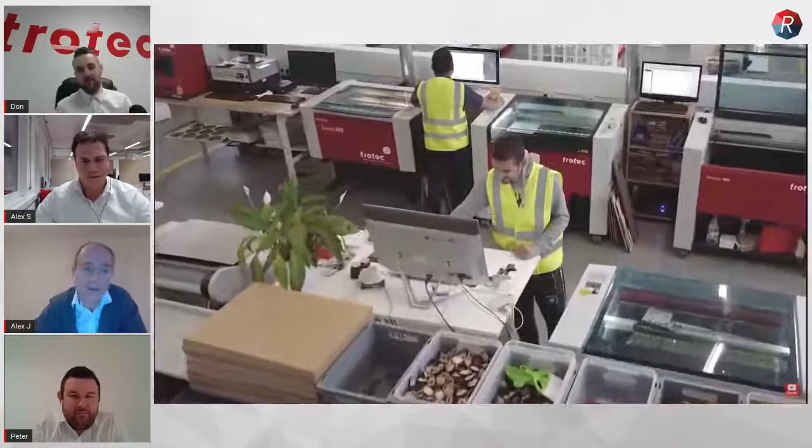To be honest, in the beginning there was some initial skepticism, and I totally understand, because when you change something that is well known and loved by the people, everybody was like, okay, where's my job control going? And we're going to answer this today too.

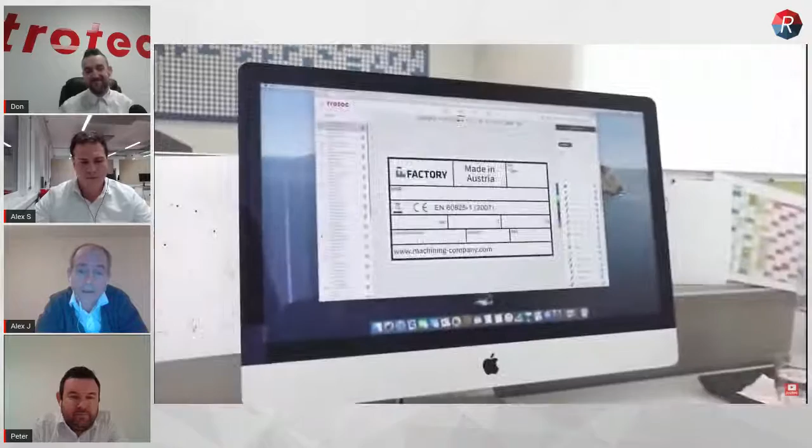But now we already have a lot of Ruby fans. People love how the photo engravings turn out, the import functions, hot folders. We're receiving requests that people want to use the Ruby API to connect their web shop to it and to fire their lasers from external software programs. So we've gained a lot of insight in a very short period of time in the last weeks.

This is exactly why we are doing this open beta, to learn from you and to drive and develop Ruby together with you and to change the laser world. Thank you for contributing to Ruby. We're going to continue to do this.

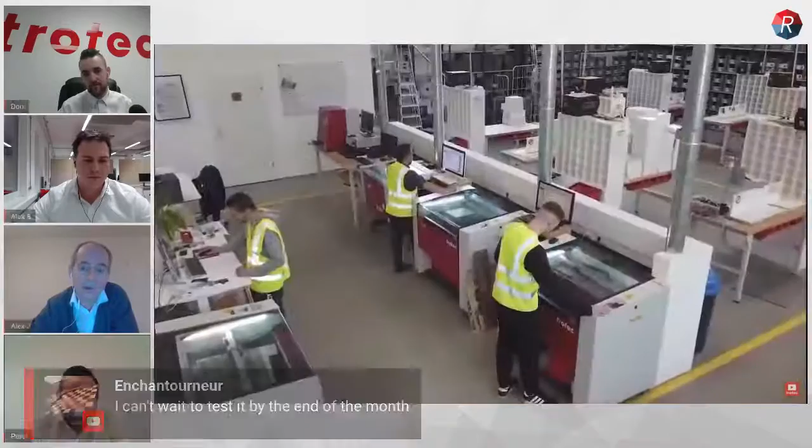So why is Ruby there? We started this initiative, I would say, a few years ago when we developed Job Control 10. So this was quite a while ago. At that time, we realized that how people work with their lasers has changed. Laser engraving and cutting is not what it was 10 or 15 years ago.

It went from the garage to manufacturing settings and workshops. So it's big business already. A lot of our customers, they multiplied their business. So the requirements, what the software should do and has to do, changed and increased.

People wanted to operate multiple lasers at the same time from one PC. They want to use Macs, they want to use mobile phones and tablets to control the lasers. They want software where they can easily create their laser jobs and work with their laser parameters, very, very simple and straightforward.

And the laser should not be a standalone unit. The laser should integrate into a total overall workflow and exchange information and files with other systems like ERP, MIS, or webshop e-commerce systems. Multiple users, multiple roles, and pre-press integration, that's really a must. So the demands from users, what we experienced in the last years, really increased.

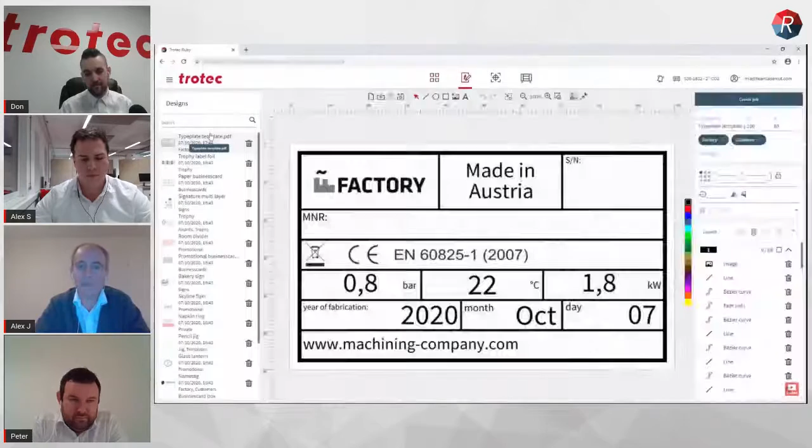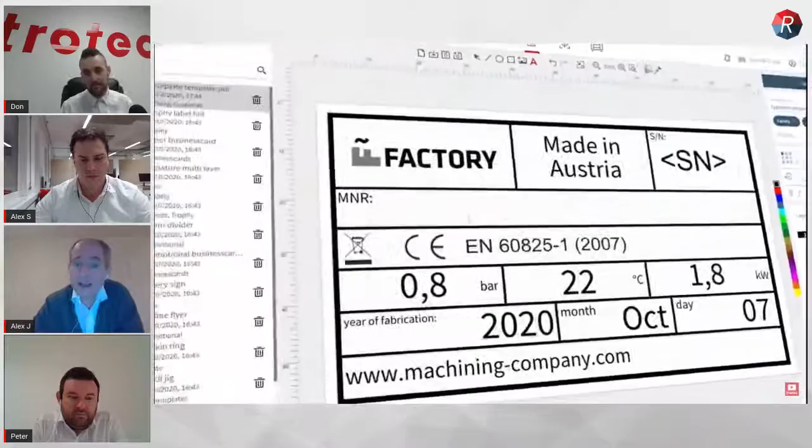And that's what we like to do with Ruby. Ruby stands for all that. We want to connect lasers. We want to connect laser users. Ruby is open to any customer workflow, providing a high degree of automation. And we want to provide laser users with all the tools they need for their daily work to really redefine laser software and set new standards for you and together with you.

And we're doing this now with the open beta. We're embarking on a digital journey, and we would like to lead you into a new era of laser engraving and cutting. So that's my small pitch for Ruby.

And now I would like to hand over to the tall Alex, the big Alex, to give you a walkthrough and show you what Ruby is capable of and how it works. So it's your turn, Alex. Thank you, Alex. Even we get confused sometimes.

Well, thank you for the introduction. It's a pleasure really to be here today, to have all of you on this webinar today. I would like to show you and give you a first demonstration of Ruby, and give you a little introduction to what we can do with Ruby already now with the open beta, and give you also an idea of where we're actually going.

So I think first of all, and probably the most important and one of the most significant changes, is that Ruby is a web-based software. So this will give us many, many benefits in the future.

Because Ruby is a web-based software, it means we will be able to actually just directly use and access it from a web browser. So in this case, I just opened Google Chrome, and I can directly log into the software and start working with my laser right away. This means that in future we will be able to really access all data, all information, all customer information from anywhere, anytime, just online via the internet.

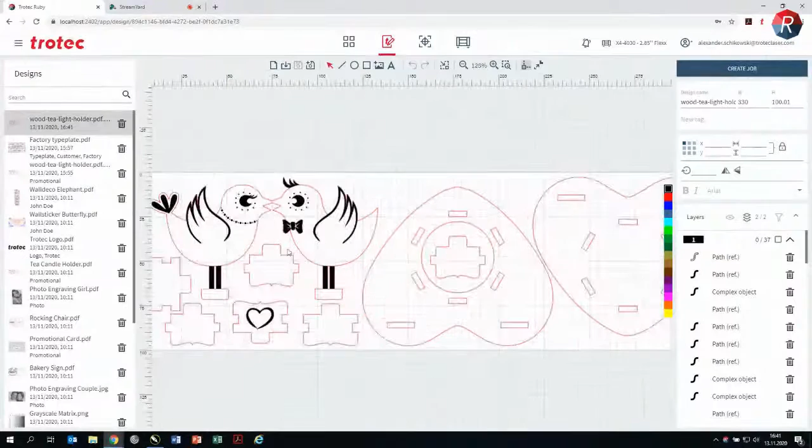It's here now already, and I will enlarge my screen a bit. I can directly open it in Ruby, have everything available in here, have the design in here, can have a look at it, can check it, see if everything is correct in here done. In this case, it's all good. I can create a job out of it now.

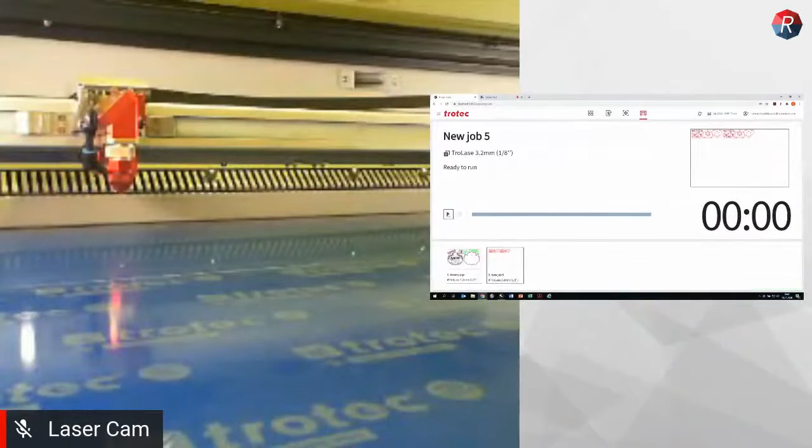The laser you see is already progressing and lasering firing next to me. I will stop this now for a demonstration and show you another use case.

So you saw how really super easy and intuitive it is to just directly import a PDF file without actually going through any time-consuming printer driver, or also any additional graphic program, for instance. You can just directly import it.

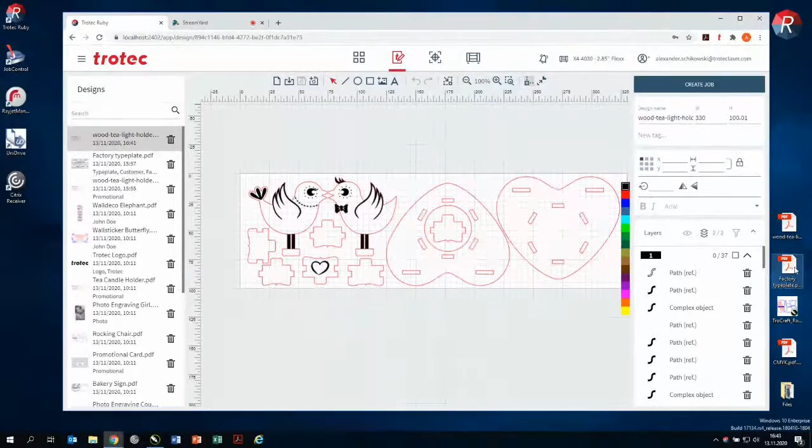But also, even if we need to make some adjustments, I will again just directly import the PDF file in here, can open it in here, and have my design available here as well. Some of you might notice this is the design file we have seen also in the Ruby launch video. And I can make adjustments directly in here now.

So in our case, the date is not correct, it's still the 12th. So I can jump into here, make correction, set it to the 13th of November, and again, create a job out of it.

I can duplicate it again with copy paste with the shortcut on the keyboard. And I can also do kind of small batch serialization now in here. So I can directly again here, just click on the design, edit it, and can increase the serial numbers.

Going to 18. Going to 19. And last but not least, this one to 20.

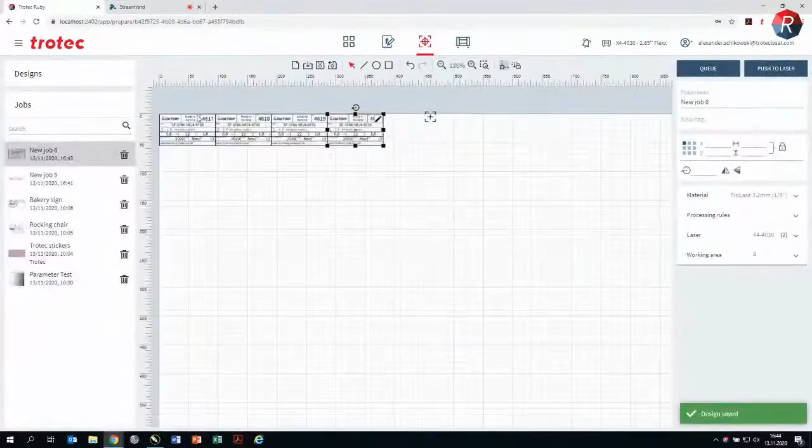And I can very quickly make a small batch serialization of these templates directly in Ruby without going to a different software again or any editing program.

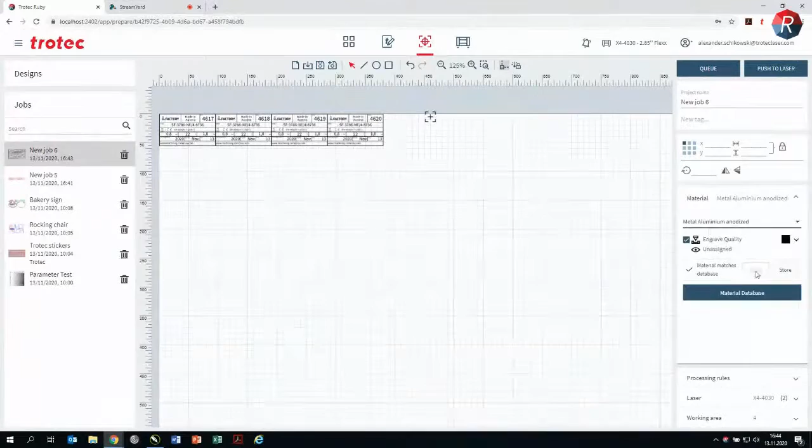And again, just select the correct material. So for those templates, let's assume we are using some anodized aluminum. So would all be correct set again, and can then again push it to the laser, and I could start lasering right away again.

So you see also how much flexibility Ruby gives us in terms of graphic editing functionalities. But we also understand that from time to time, users just prefer to actually stay in their graphic editor. And for this, Ruby is also providing some really cool features and benefits.

So during the open beta now, we are also delivering with Ruby a small application for Windows, called the Tray app, which is running here down in the taskbar.

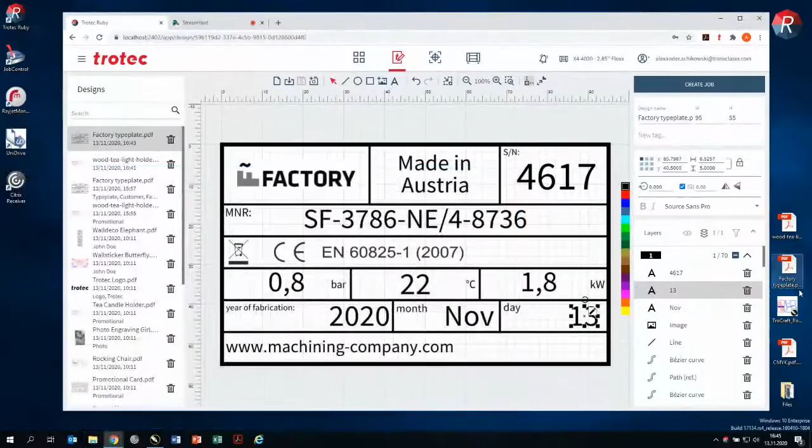And this tray app also contains an import folder. So I can open this directory, and whenever I save a file to this import folder, it's automatically uploaded to Ruby. So I also prepared a job in CorelDRAW for you, this rocking chair. And when I push this now, publish this as a PDF, and save it to this import folder,

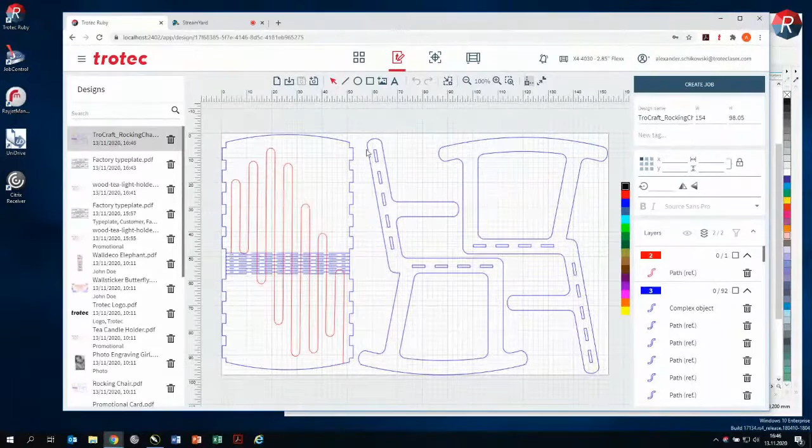it will automatically be imported in a few seconds to Ruby. And it appears already, it is ready here. So this means you do not have to actually complete the designs, for instance, if you would like to stay with your preferred graphic editing, a graphic editor, you can just directly do all this.

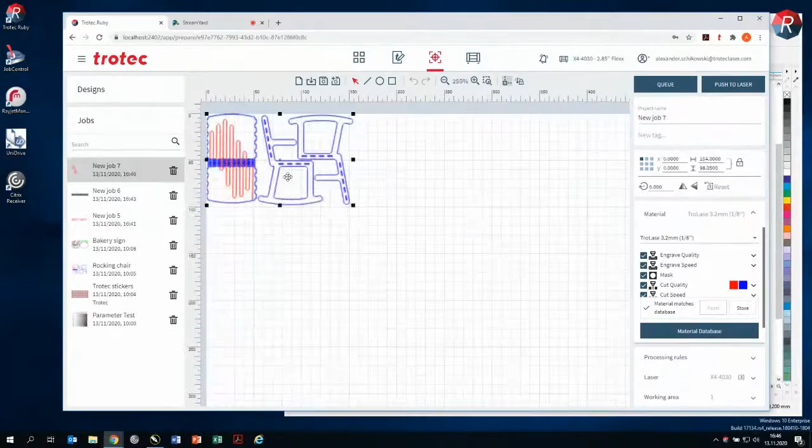But still, as Ruby is directly importing those files, it provides us with a lot of functionalities also now, as we can actually also edit these designs directly in here. So we can still, for instance, transform them, enlarge them, make them smaller, also rotate them, for instance.

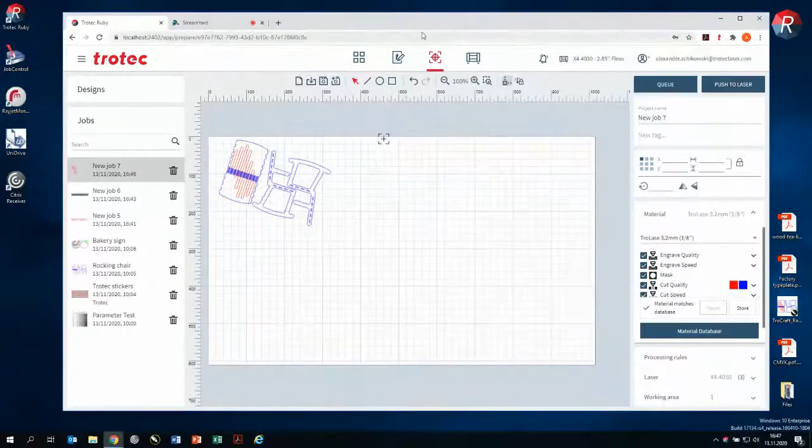So this was just as an example, some examples for use cases of what we can do in Ruby. I would now also like to go into more detail of all the individual phases in Ruby, because you might have noticed that whenever I progressed in the workflow, we're also changing the pages up here. So we're having basically 4 main steps in Ruby that guide us through the entire workflow.

First of all is the management phase. The second one is the design phase. The third one, the prepare phase, and the fourth is the produce phase. I will say a few words now to all of the individual phases.

Basically, the management phase really is there to administrate all our different designs and jobs, but also gives us the possibility to manage them in a more detailed way. Ruby now also comes with a system including tags, so in the tags we can attach our jobs with some more information that can be used for enhanced administration, but also for instance for searching and quick identification.

So we can, for instance, just attach them with some information on what customer we have made a job for, good old John Doe, but also what type of application is it. Is it a promotional application? Templates, for instance, as well.

And we see here, there's a differentiation between the designs in here and the jobs. Basically designs is all the different files we directly import to Ruby, the pure graphic information. And as soon as we attach some material information to it, it's becoming automatically a job.

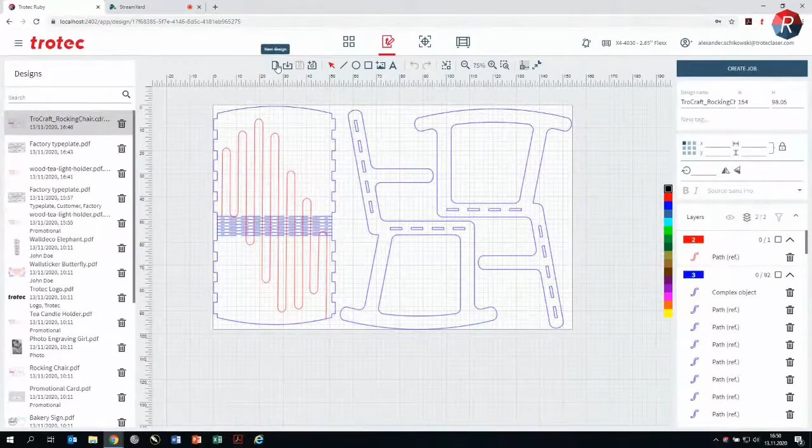I create a new page, and we see here on the top toolbar we have some drawing functionalities and capabilities already. For instance, we can make a rectangle. Here on the sidebar, we also have the properties for it, and we can adjust the size of this, make it 100 by 60, lock the proportions again, and fit this here.

We can also, of course, add ellipses, circles to it, or also lines, and we can also add text to it. So I use the text tool to enter some text in here, a name, Lucas, for instance.

And here on the side, on the property field, again, we have some additional information and properties to modify this text now. So we can change the font type, for instance, something like this. We could also make it a bit bigger, make it a bit bold.

We can also add an image directly here. So add this image of a tractor to it. It's imported, but it's a bit too large now, so I'll make it a bit smaller, then increase it a bit.

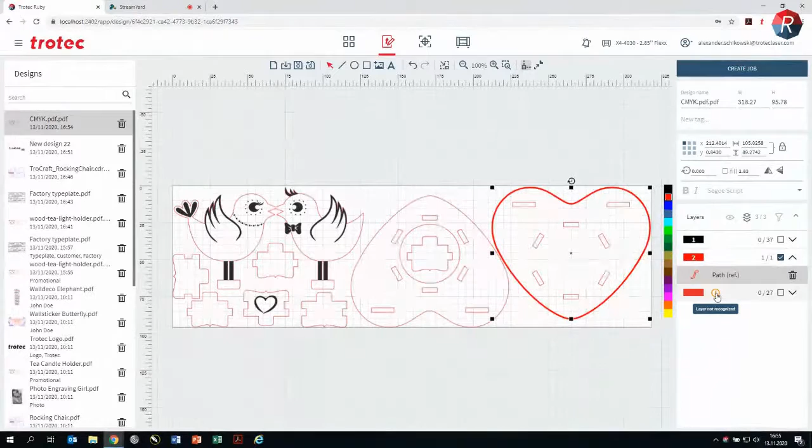But I can just select it here, assign it to the red color, to the red layer, and everything matches here again. Also the red one here, I changed this to CMYK. It's recognized, and I can select it now and assign it to this layer, to the red layer, and all is good and can be processed now by the laser as well.

Also, we see here now that this was actually not set as a hairline. The height here, we see the line width is 2.83, and we can make this now directly here in Ruby and set it to 0, making all the adjustments we need.

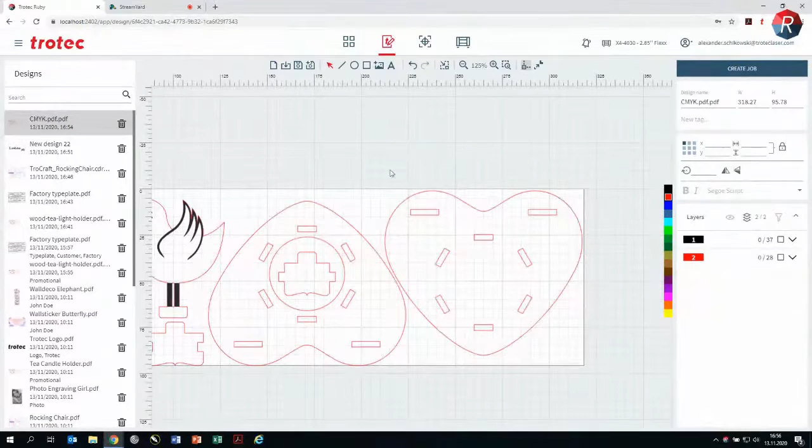But even though it would not be put to 0 here, the laser can still process it and it will still be recognized as a vector in the prepare phase. Let me put this back now and show you this in the prepare phase.

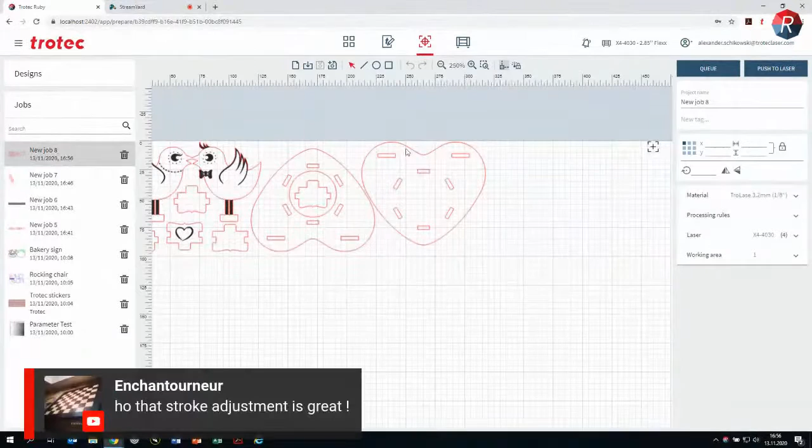Create a job out of it. And you see the line is shown as a hairline again. So Ruby recognizes that this is a vector, and you can directly here via the material properties assign and say this should be treated as a vector, it should be cut, or if it should actually be engraved.

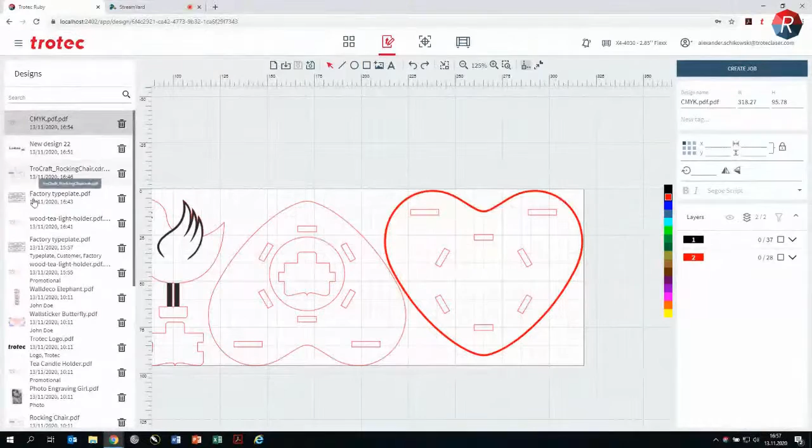Let's go back to the design page. Some more things here to see and to show. First of all, on the left side, we're also having the design list, which basically contains all the different designs we have stored in Ruby. We can either delete them from here, but also open them from here and start working on them.

We can also save them as a new design. So if we want to keep the original one, we just click here, save as new design, and it's saved now as a new design. We can change the name here, 'Test' for instance. And as mentioned before, we can also assign them with a tag now, so we can later easily find them again, and save it.

Then on the right side, we have seen first of all the dimensions of the sheet itself, of the job, of the design itself. Then when we click an object, we also see the dimensions of the object itself, and the coordinates of an object. We can also select different anchor points, so if we want to precisely position them somewhere, and we can lock and unlock the proportions.

Down here, we also have the rotation option, for instance. We can enter a precise number to rotate an object, or we can just select it on the screen and move it to wherever we want it.

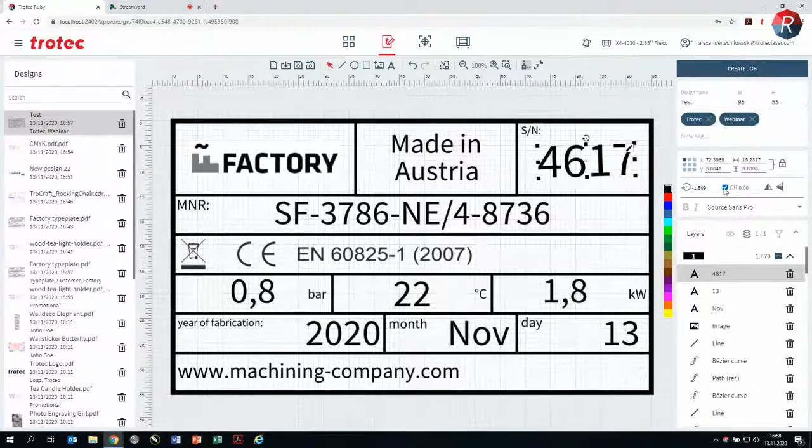We also see the fill option, so we can click and unclick this. When we unclick it, the text, the numbers are not filled anymore. This is pretty handy if we want to just cut the outline of something to do a very fast processing, instead of engraving. We can fill this again, and we can also change the line width.

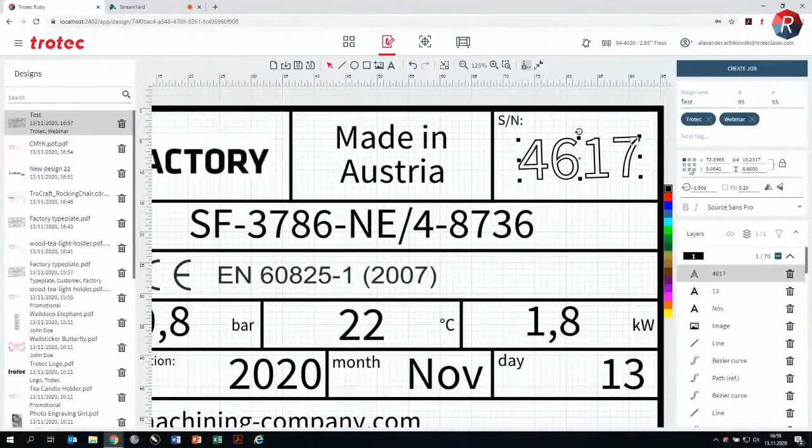0.2, for instance, and we see this is changed as well. Also, we can flip objects and mirror them. When I save this now and go back to the file we made before, when we select an image, we can also invert them. So we have this possibility and option directly in Ruby as well.

Last but not least, we have the layer card here on this side. First of all, we see the individual objects as they are grouped by the layers we have in our system, but we can also adjust this and change the view to show the object order. Now we really see the order of all the objects contained in the design, and we can change this if we want something to lay over another object. And we can switch the view back again.

Good, so this is basically the design phase. And now let's go to the prepare phase.

Also on the prepare phase, we have the design list again, so we can access all the different designs we have stored and put them on the laser bed. But also we can go through all the different jobs in here, the ones we created before already.

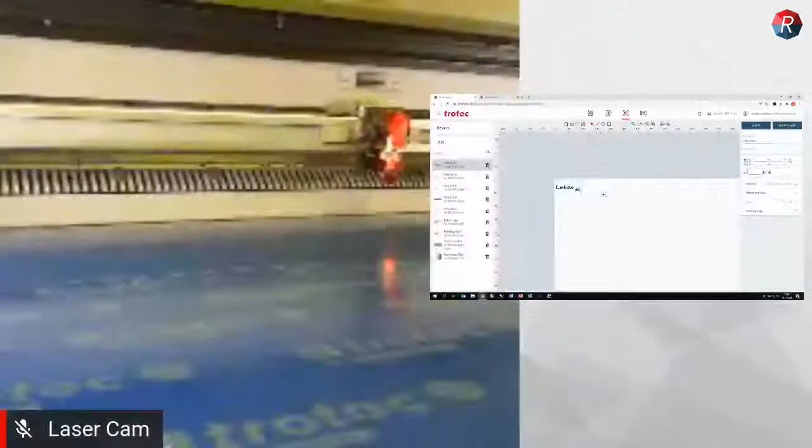In the middle, we see our virtual laser bed, and down here we also see the crosshair, which represents our laser head. There's a pretty cool and handy functionality in Ruby now, where we can use this crosshair, drag and drop it, and let the laser actually move. I will just show you this, and we see on the laser camera that the laser head has already moved.

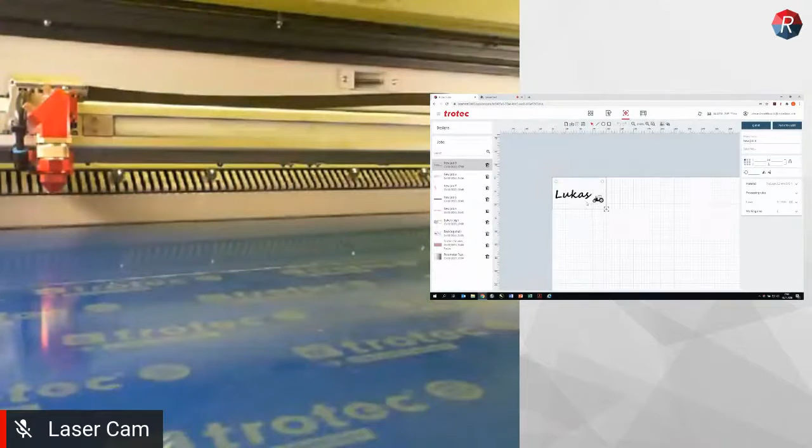And what is this good for, more or less? We can do a super fast and super accurate estimation of whether a design will actually fit on a job. In this case, I could just drop it to the corners and check if the design will fit on the job. I do not need to move the laser manually with the keypad. I can just drag and drop it on here and do this super fast and easy, immediately seeing clearly if it will fit on the workpiece.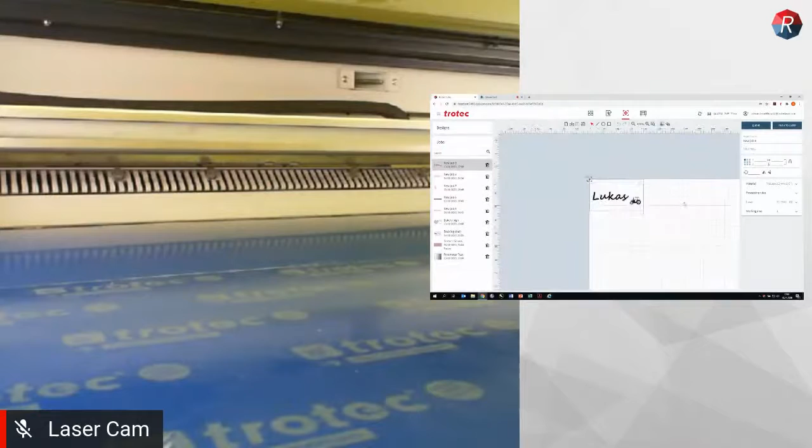Of course, sometimes this moving of the crosshair is not intended, so we can also just lock this. When I lock it, I cannot move it anymore, and it will be safe from being accidentally moved around.

Then on the right side here, we have first of all the name field, where we again can assign a name to a job, but also attach it with a tag, for instance if this job mainly should be done with TroLase. We also have the property field.

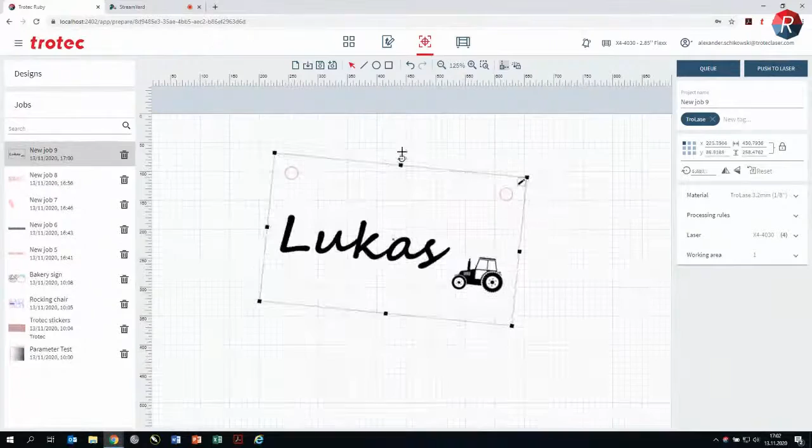So in the prepare phase, we can also transform jobs, making them smaller or bigger. We can rotate them, and as mentioned before and as we've seen, we can also duplicate them just by copy paste.

And we see the pen, as I showed you before, we can just also directly jump to the edit functionality from the prepare phase if we want to quickly do some small adjustments on the design.

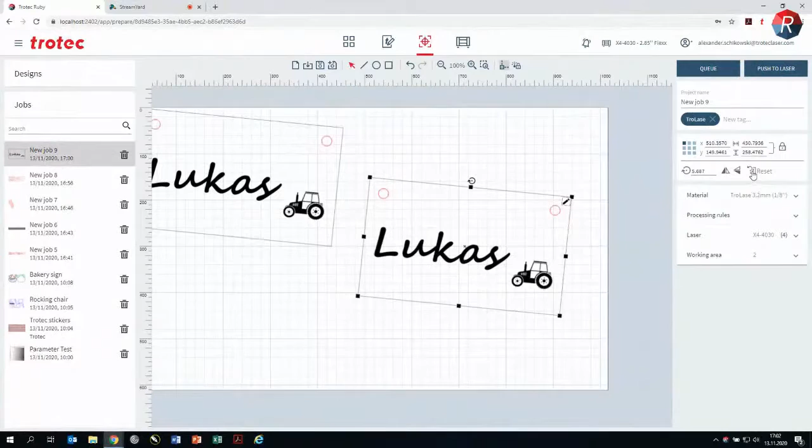Also, sometimes we actually want to reset the job to the original format as it was sent, as it was transformed in Ruby. We can just reset it, and it's again the original size, the original rotation, the original angle. Then we have the material card.

And this is probably one of the most exciting renewals we have in Ruby, because I know that pretty much every one of us, at least for the first time when we got in contact with lasers, we thought, why is this so complicated with the parameters? Why are the laser settings so complicated? I just want to cut some piece of wood, or I just want to do engraving of some wood.

I just want to do a dark engraving of some wood. For Ruby, we completely started from scratch with the material database and thought about what we can do here and how we can improve this. We introduced something called material effects to really work on this topic and change this.

We want to provide laser users with this capability, this function, to just select what effect we want to create on a material. So for instance, on some piece of wood, just have a dark engraving or a deep engraving. We will extend this methodology of material effects a lot in the future.

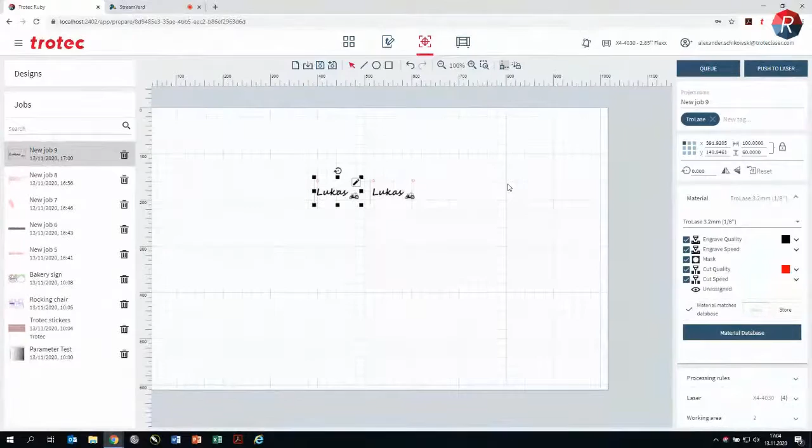So we have the first, more or less, tranche of the material effects now - the first introduction - as it's automatically importing the settings from job control during installation. But this will be extended a lot in the future, and we really want to simplify the handling of laser parameters going forward.

So what do we see here on the material card? First of all, we see the material we have selected, and we can click here and search for some kind of material - for instance, aluminium or some wood. It shows us all the different materials stored in Ruby's material database for wood.

Underneath, we have all the different material effects saved to this material. So in this case, for the TroLase, I have some quality engraving, some speed engraving, a masking effect - I'll explain this in a second - and also a quality cut or a speed cut.

Also, if we have a color or layer in our design that's not matching one of the predefined settings in the material, Ruby will show this in the unassigned area, and we can then easily assign a layer to the material effect we want.

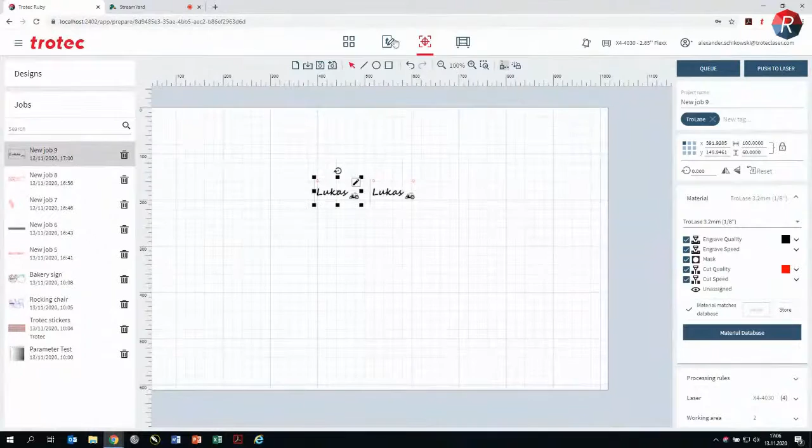I'll show this quickly. So I select this one here, put it on the blue layer, update the job. And we see now that it's not shown here because it's selected as the masking effect now.

And if I unassign it, it's here, and we see it transparent, so we immediately see that it's not being processed. We can just select it and say this should be a speed engraving, for instance.

We saw it was assigned to the masking effect before. What the masking effect does is basically, if we have an object overlaying another object, we can say this should actually be a masking and not be processed.

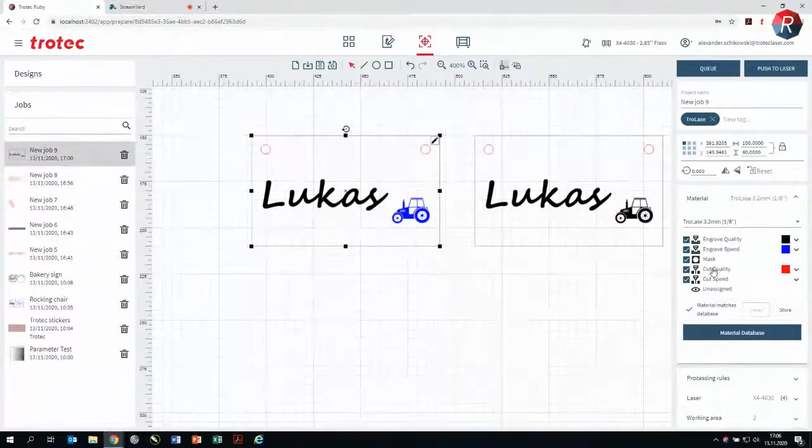Just to quickly show you this, I will create a design - make a circle, fill this with black, draw another circle, put it on the blue layer, also fill it, then position it here and create a job out of it.

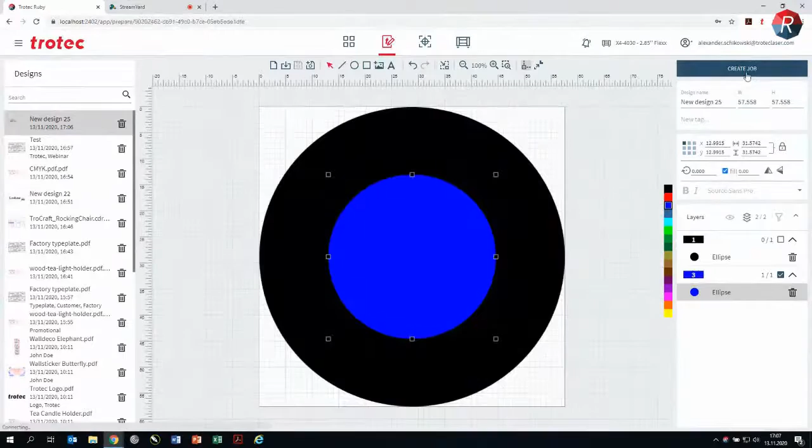We see now, because it's assigned to the masking effect, the blue circle is covering the black one, and the inner blue circle is not being engraved - we can actually create, for instance, a donut with this now.

If we assign it to the engraving as well, we see that this area will be engraved too. Or if we unassign it, we see the entire black circle would be engraved. This gives us functionalities and options in the future to create individual designs and how to build them up.

Then underneath, we also have the processing rules, and there's a pretty cool feature hidden in here. First of all, we have the option and functionality 'inner geometries first,' as we know from job control - so when cutting, to actually cut the inner geometries first.

Ruby also brings a new option now called 'skip overlapping cut lines.' Some of you might know this as common line cutting, as it's often called in the printing industry. When two cut lines overlay, it would only cut them once. So for instance, if I create a rectangle like this, the cut line in the middle between them will only be cut once.

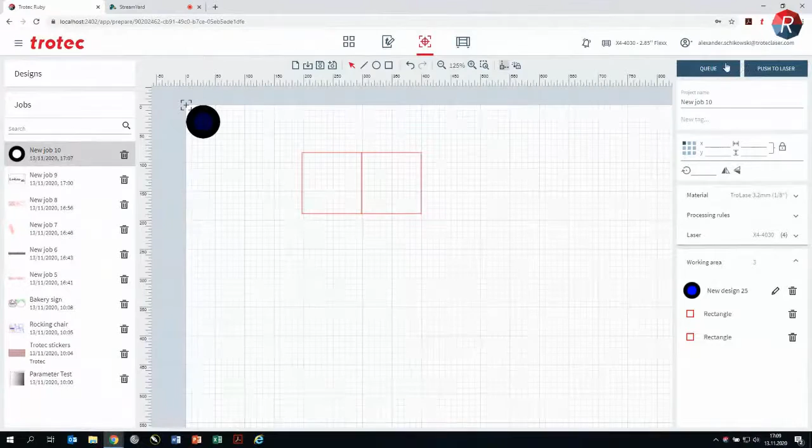And here at the top, we have two buttons, the Queue and the push to laser. This is also a renewal in Ruby, that we're actually having a real job queue. So when we send something to the laser, it's really queued up, so we can process job after job. Unlike in job control currently, where it's more or less a list, this is really a queue with a distinct order, where we can process them one after each other.

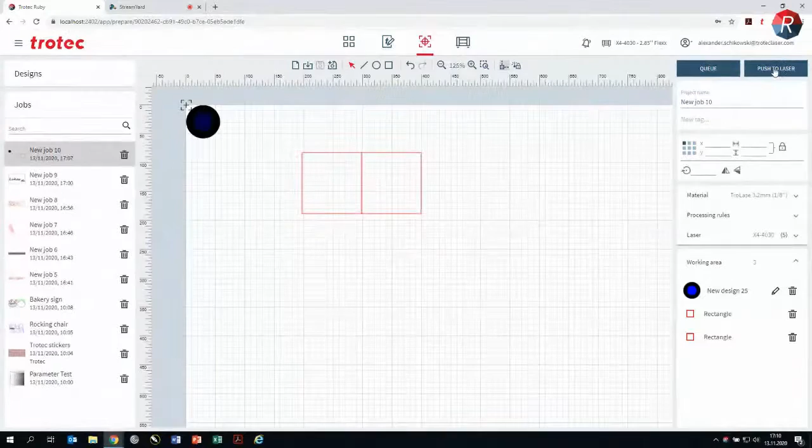When I press the Queue button, it will just be added to the queue, and I get information boxes at the bottom that tell me what just happened. Or I can directly push it to the laser, which adds it to the queue and immediately jumps to the produce screen, so I can start lasering right away by just hitting the run button.

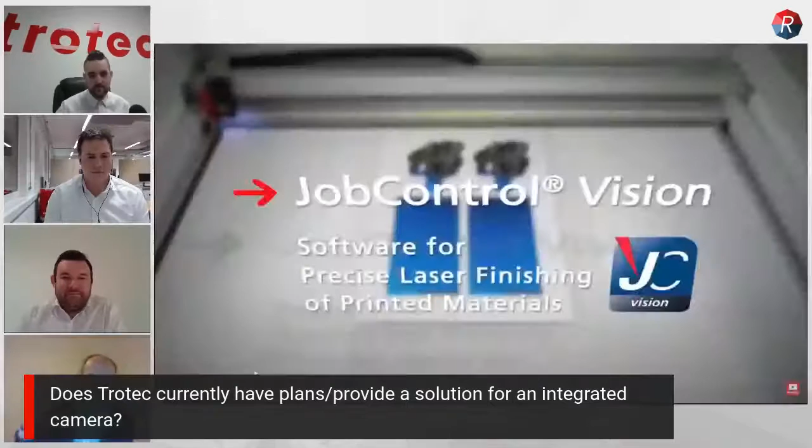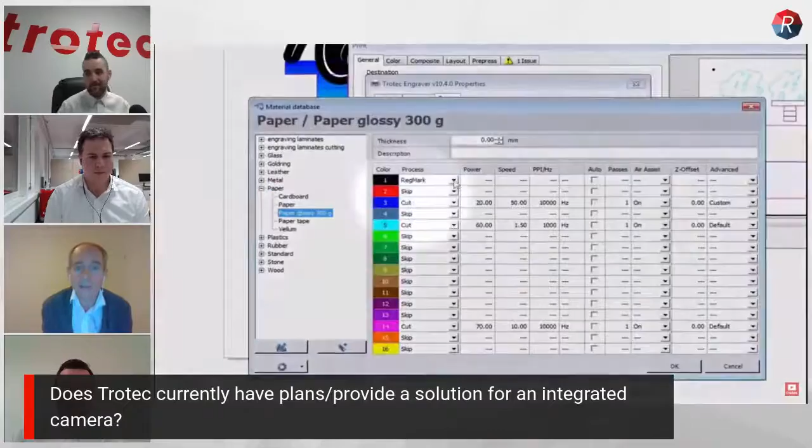We launched Job Control Vision, but at the time it was called iCut, in 2001 already, and Job Control Vision came in 2012. On the Speedmarker series, on the Galvo systems, we have off-axis camera systems where the camera has a view of the working area, and we have systems where you see with the camera through the Galvo head, directly on the working area through the laser head. So very sophisticated solutions here, and you definitely can say that we believe in vision systems and the benefit that vision systems bring to laser engraving and cutting.

And yes, it's coming - it's coming next year. Next year is going to be busy. No, it is already busy, because what hits the market next year is already here, in our work and our daily life.

I have a question here, and I will go back to Alex in the applications lab. Thank you so much again for the demo - I want to give you some time to just rest and relax. I know it's tough to talk for that long straight, but thank you so much, it was fantastic. I have to ask, as someone deeply connected to the consumables here in Canada, I have to know if it's going to be possible to connect a web shop with Ruby on behalf of all the customers I know I sell consumables to, who have their own web shops and web businesses online.

Well, that's a very good question. And as I mentioned in the beginning, initially, Ruby is a web-based software, and there are many things coming with this. We really see the future of laser users, of lasering, as a connected one, and really Industry 4.0 and all these things are coming to the laser world as well.